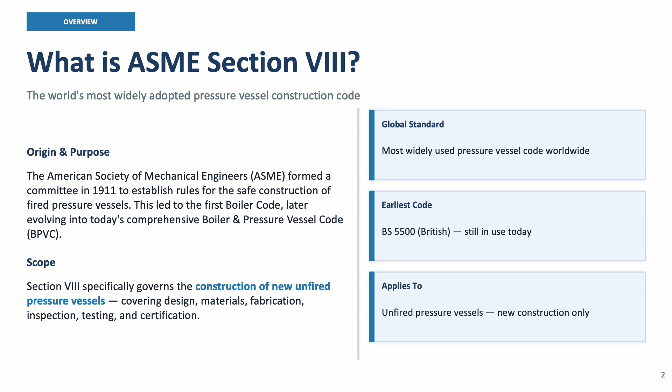The scope of ASME Section VIII specifically is to govern the construction of new unfired pressure vessels, covering design, materials, fabrication, inspection, testing and certification. Global standard: it is the most widely used pressure vessel code worldwide. An earlier code, BS 5500, is used in Britain and is still used today. It applies to unfired pressure vessels in new construction only.

ASME Section VIII has three divisions. Division 1 stands for standard rules for pressure vessels. It covers pressure less than or equal to 3000 psi, factor of safety equal to 3.5, spot radiography, and static and mobile vessels.

Division 2, alternative higher design rules: no pressure limitation, factor of safety 3, 100% radiography and static vessels only. Division 3 covers the high pressure vessel rules: very high pressure vessels, advanced analysis, intensive inspections and static vessels only.

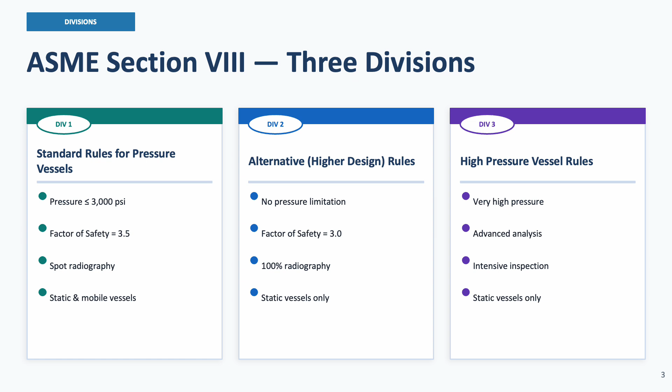Division 1 versus Division 2. What are the key parameters? If you see the design pressure, in Division 1 the maximum is 3000 psi. In Division 2 there is no limitation. Design temperature in ASME Section VIII Division 1 has no limitation and Division 2 also no limitation. Factor of safety in Division 1 is 3.5, Division 2 is 3.0.

Hydrostatic test: here we use 1.3 times design pressure, and in Division 2 we consider 1.25 times design pressure. Pneumatic testing based on ASME Section VIII Division 1 takes 1.1 times design pressure, but under ASME Section VIII Division 2 it takes 1.15 times design pressure.

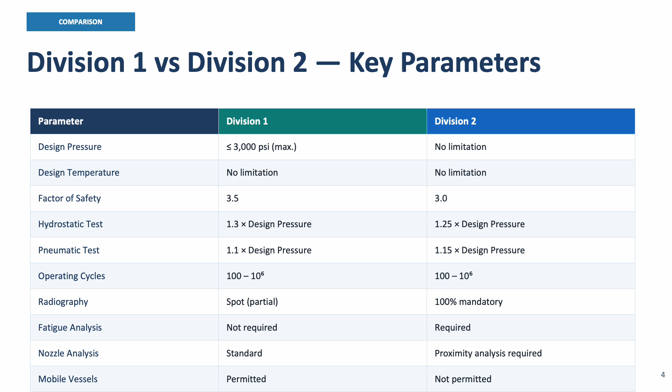What are the operating cycles? In Division 1, 100 to 10 power 6, and Division 2, 100 to 10 power 6. Radiography: spot radiography, called partial, and in Division 2 100% radiography is mandatory, full radiography. Fatigue analysis is not required; in Division 2 fatigue analysis is required. Nozzle analysis is standard, but Division 2 requires proximity analysis. Mobile vessels are permitted; in Division 2 mobile vessels are not permitted.

Division 1 code construction: three subsections covering the full scope of pressure vessel requirements. Subsection A is the general requirements, Part UG, known as general requirements for all construction methods and all materials. It covers the scope, materials, design, fabrication, inspection, testing and certification rules common to all vessels.

Subsection B covers the fabrication methods, with three different parts: Part UW, the welded construction requirements, Part UF for forged, and Part UB for brazing. It covers method-specific fabrication, examination and qualification requirements. In Subsection C, materials, there are 9 material-specific parts: carbon and low alloy steel, non-ferrous and high alloy steel, cast iron, cladding and more. Material-specific supplementary requirements beyond Part UG.

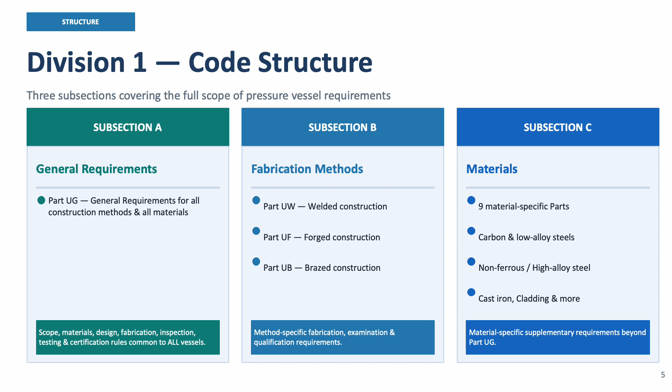In Subsection A, there is more detail about the general requirements, which we cover as Part UG: scope and definitions, allowable stresses, design requirements, materials, openings and reinforcement, pressure relief devices, inspection and stamping, and testing.

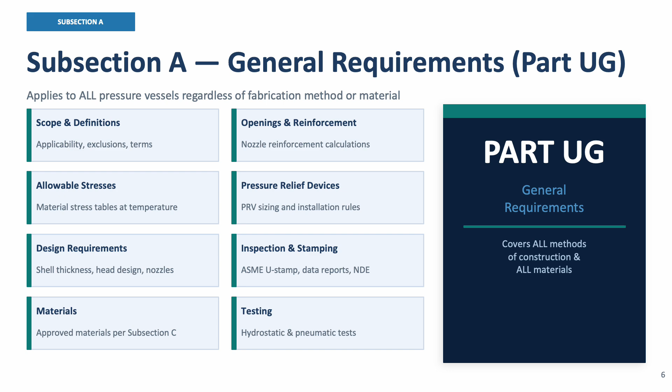In Subsection B, fabrication methods, Part UW is the welding requirement, covering the common fabrication method for pressure vessels: weld joint design, joint efficiency, preheating, PWHT, NDE of the welds and welder qualifications. Joint efficiency ranges from 0.65 to 1 based on the RT percentage requirements. Preheating and interpass temperature control, PWHT requirements by thickness and materials, and full, spot or no radiography determines the joint efficiency, which ranges from 0.65 to 1.

Okay, so if you see Part UF, covering the forging requirements: rules for pressure vessels fabricated from solid forgings, used where extremely high structural integrity is required, such as very high pressure or safety critical applications. UT examination of forgings, heat treatment after forging, allowable design stresses for forgings, and specific material forms like bar, billet and discs.

Part UB covers brazing, less common: vessels joined by brazing, a filler metal process, with strict qualifications, design limitations and NDE. Brazing procedure qualifications, brazer qualifications, limited pressure and temperature range, and 100% visual plus spot NDE.

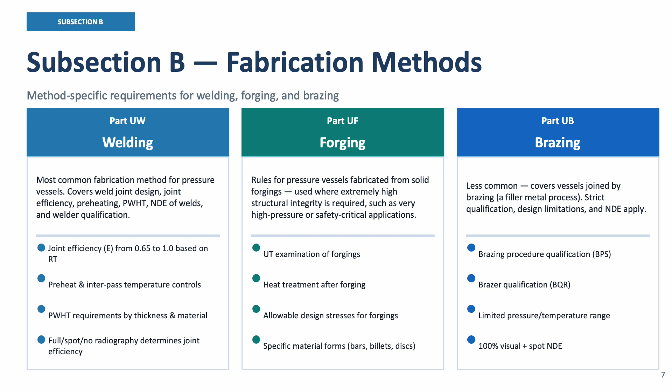Subsection C is the material-specific requirements. Here there are 9 parts, each covering the supplementary requirements for a material class. UCS covers carbon and low alloy steel, the most common. UCI covers cast iron, limited use. UHT covers ferritic steels, high temperature service.

UNF is for non-ferrous material, where material covers aluminum, copper and nickel. UCL is especially for the cladding, which cladding we use for corrosion resistance. And layered constructions, ULW, is especially used for high pressure.

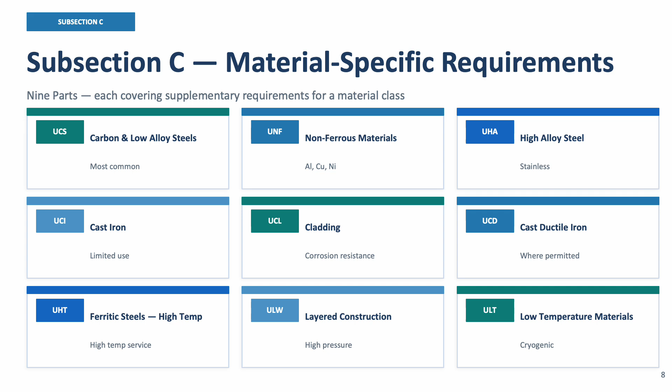UHA, high alloy steel like stainless steel. UCD is the cast ductile iron wherever it is permitted, and ULT for low temperature material like cryogenic services.

In mandatory appendices and NDE methods, there are 31 mandatory appendices in Division 1. Four are critical for inspections. Appendix 4 is for radiographic examination, X-ray and gamma ray imaging of welds to detect volumetric defects, porosity, lack of fusion, slag, etc.

Appendix 6 covers magnetic particle examination, which detects surface and near-surface linear defects in ferromagnetic material using magnetic fields. Appendix 8 covers liquid penetrant examination. Liquid penetrant is applicable for surface flaw detection using colored or fluorescent penetrant dye, and works on any non-porous material.

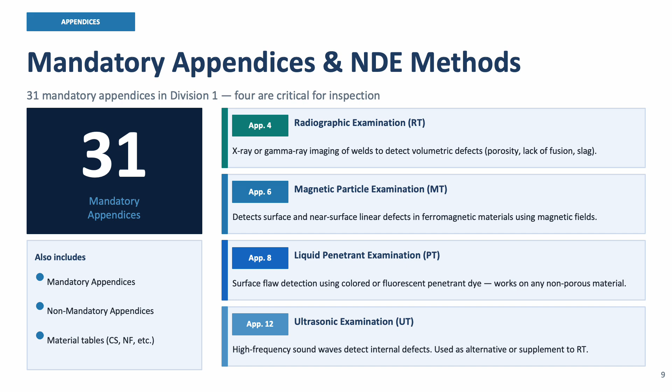Appendix 12 is for ultrasonic examination, where high frequency sound waves detect internal defects, used as an alternative or supplement to RT. Key clauses: inspection and testing, Part UG, critical paragraphs every inspector must know. UG-93, inspection of materials. What it covers: material must be identified and certified prior to use; mill test reports, marking and traceability are required.

UG-99, this section covers the hydrostatic test. Test pressure should be minimum 1.3 times MAWP, known as the maximum allowable working pressure. Minimum hold time as specified. Inspect for leaks at all joints. UG-100 is the pneumatic test, used when hydrotesting is impractical. Test pressure should be 1.1 times MAWP times stress ratio, with extra caution for stored energy risk.

Test gauges: at least two gauges of appropriate range are required. Gauges must be calibrated, with a dial range of 1.5 to 4 times the test pressure.

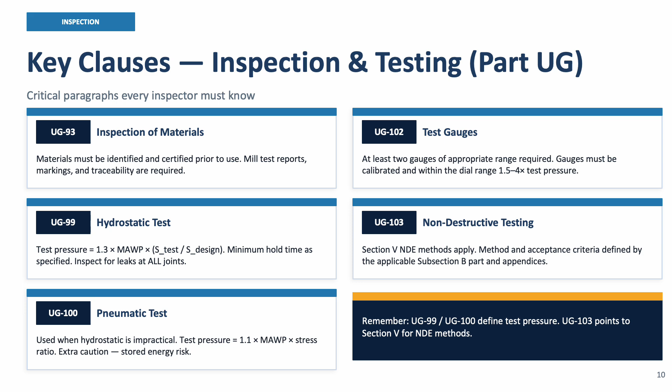Key welding requirements, which you will see in Part UW. Key paragraphs for welding procedure and personnel qualifications. There are three sections. UW-47 is for welding procedure specifications. What you will see in this section: each welding process must be covered by a qualified welding procedure and its supporting procedure qualification record. The WPS defines base metal, filler, position, heat input, preheat, PWHT and acceptance criteria, qualified as per ASME Section IX.

UW-48, welder and welding operator qualification. All welders and welding operators must be qualified before performing production welds. Qualification must be performed and documented as per ASME Section IX. Welder qualification records are retained and renewed as per requirements.

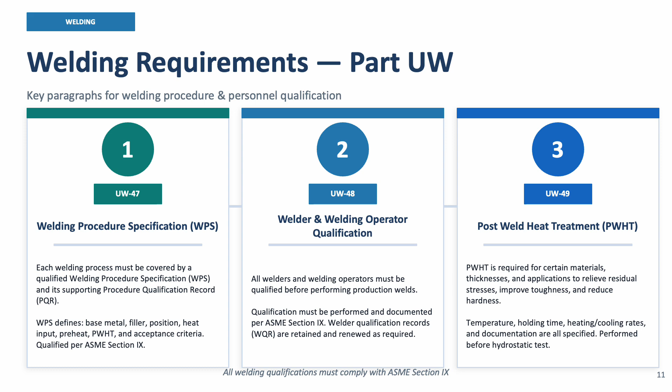UW-49 is for PWHT. In this section, PWHT is required for certain materials, thicknesses and applications to relieve residual stress, improve toughness and reduce hardness. Temperature, holding time, heating and cooling rates and documentation are specified. PWHT is performed before the hydrostatic test.

ASME Section VIII is not self-contained. It references additional ASME sections for welding and NDE. ASME Section VIII does not stand alone. It explicitly requires compliance with Section IX for welding qualification and Section V for NDE methods.

What is ASME Section IX? It is a separate section to refer to, which covers welding, brazing and fusing qualifications: PQR, procedure qualification records, welding procedure specifications, welder performance qualifications, and essential variables for each welding process. Applicable to ASME Section VIII, B31.3 and more.

ASME Section V covers non-destructive examinations. In Article 2 you will see radiographic examination. Article 6 for LPT. Article 7 for magnetic particle examination. Article 4 for ultrasonic examination and general requirements.

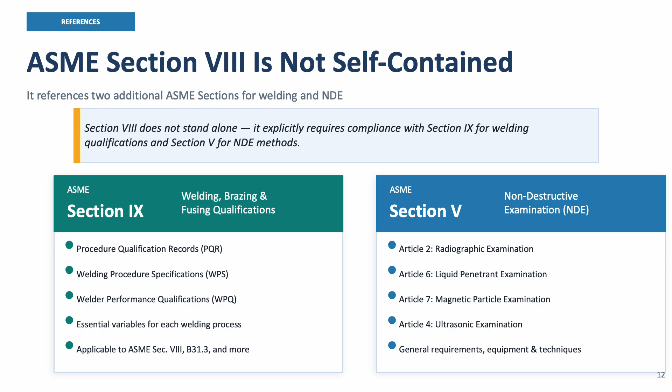So, what is the key takeaway from this video and these slides? About ASME Section VIII, there are three divisions. Division 1 is the standard, with a factor of safety of 3.5. Division 2 is the alternative, with a factor of safety of 2.4, and Division 3 is for high pressure. Choose based on pressure, fatigue and mobility needs.

Second is the hydrostatic pressure. As per ASME Section VIII Division 1, hydrostatic pressure is 1.3 times MAWP, the maximum allowable working pressure, times stress ratio. Division 2 is 1.25 times design pressure times stress ratio, and pneumatic pressure will be 1.1 or 1.15 times design pressure respectively.

Third one is the code structure. Section VIII Division 1 has three subsections. A is the general part, UG; B is fabrication methods, UW, UF and UB; and C is the material-specific parts. Fourth, key takeaway for the critical inspection clauses: UG-93 covers materials, UG-99 hydrotest, UG-100 pneumatic, UG-102 gauges, UG-103 NDE, and UW-47, 48 and 49 cover the welding requirements.